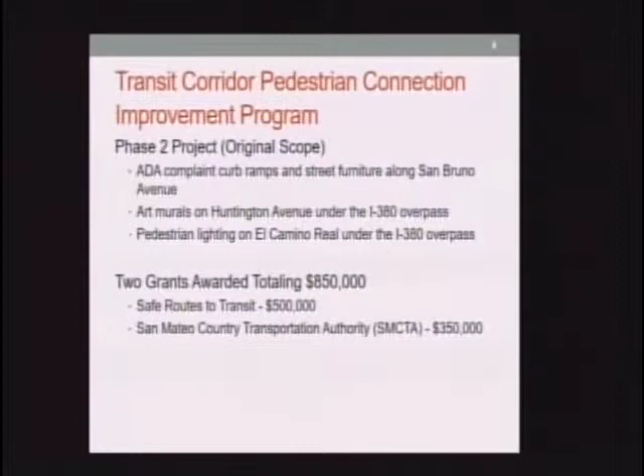Therefore, staff investigated a project rescoping. Staff reviewed available traffic collision data and prepared, in 2017, this collision heat map. What this map shows is an image of the collision heat map generated by Transportation Injury Mapping System using data from the statewide Integrated Traffic Records System, otherwise known as SWITRS. This data represents the years from 2008 to 2016.

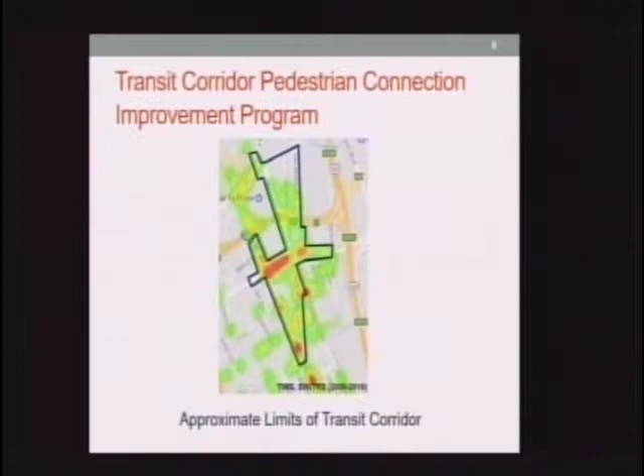Areas that are shaded in green, yellow, orange, and red are locations where collisions have occurred, resulting in injury. Areas with higher frequency or more severe levels of injury are shown in increasingly warmer colors in orange and red. When overlaid with the limits of the transit corridor, it becomes apparent that there is a hot spot along San Bruno Avenue between El Camino Real and Huntington Avenue, which is shaded in red, towards the center of the screen.

Staff subsequently also included the most recent updated information to include 2017 information, and similarly there is the hotspot on San Bruno Avenue. This was a map specifically for bicycle and pedestrian injuries.

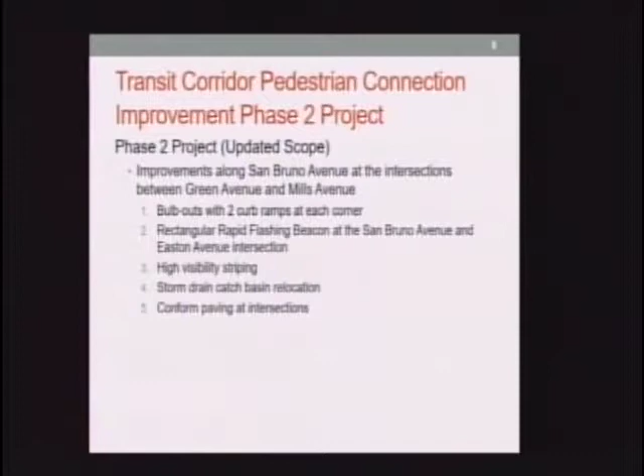With this information, a project rescope was developed. It avoided work within Caltrans right-of-way, which El Camino is. The project improvements included bulb outs with 2 curb ramps at each corner between Green Avenue and Mills Avenue on San Bruno Avenue, a rectangular rapid flashing beacon at the San Bruno Avenue and Easton Avenue intersection, high visibility striping, and incidental to this work would be storm drain catch basin relocation and conforming paving work at the intersections to allow the bulb outs to work.

I will provide in the subsequent slides a zoom in of each intersection. Contract documents were completed in January of 2019. The proposed improvements include installing bulb outs at the intersection corners, which increase pedestrian visibility to drivers and reduce the length of pedestrian travel across San Bruno Avenue.

Each proposed bulb out runs a length of approximately 25 feet along San Bruno Avenue. This distance was needed to accommodate space for 2 curb ramps at each corner. The consultant conducted a turning movement evaluation to confirm whether the proposed corners would allow vehicles of up to 35 feet in overall length, typical of delivery trucks, to clear turns without requiring drivers to extend into adjacent travel lanes. Based on their evaluation, they determined that travel into adjacent lanes would not be required.

In conjunction with the evaluation, there was also an assessment of the impact of the bulb outs on parking spaces, and it was determined that if all 4 intersections were to be constructed as shown, 9 parking stalls total would be lost on San Bruno Avenue.

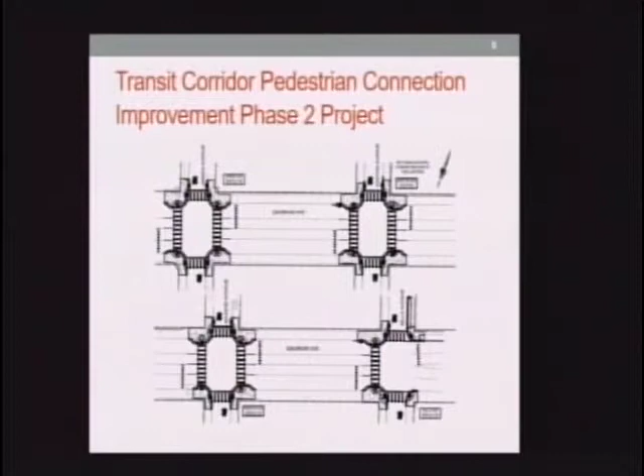The base bid is at Easton Avenue. There are currently in-pavement flashers that are difficult to maintain. Those would be replaced with a rapid flashing beacon that is above ground.

As you can see, 3 spots would potentially be lost. There are some existing red curbs, so there would not be a loss on the northeast corner. In the southwest corner there is also red curb, however it was determined that 1 spot would be lost.

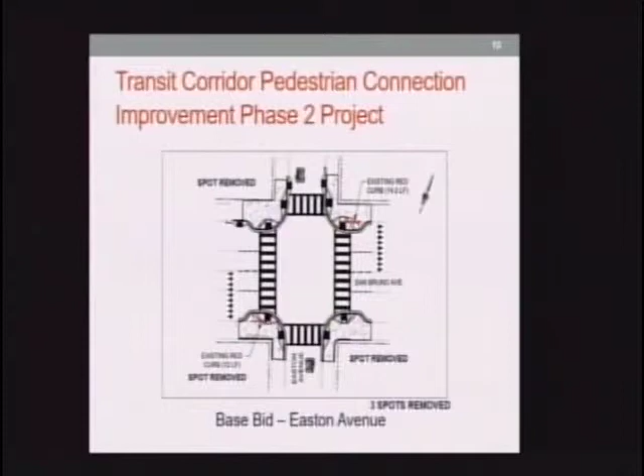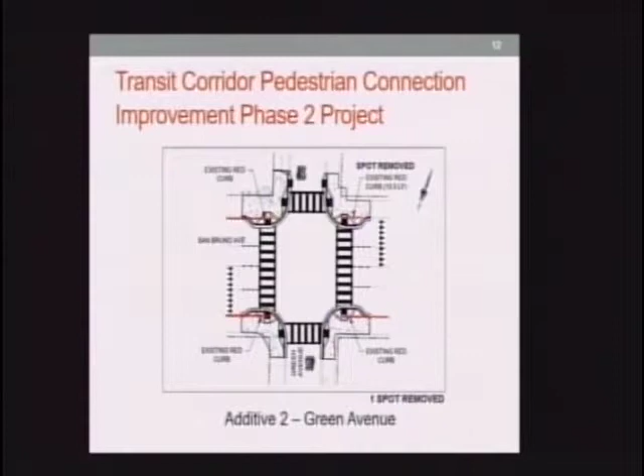On Masson, 3 spots would also be lost. On Green, 1 spot would be impacted. And at Mills Avenue, 2 spaces would be impacted.

The project was advertised in the local newspaper on January 28th and February 4th, 2019. Notice to bidders was sent to 90 contractors, posted on the city's website, and sent to 5 plan rooms.

The lowest base bid was from Golden Bay Construction. Their additive items were also the lowest. Golden Bay has satisfactorily completed numerous concrete construction projects for public agencies in the Bay Area, including the city of San Bruno. Based on their experience and performance, staff determined that Golden Bay Construction meets the qualifications to perform the work for the Transit Corridor Pedestrian Connection Improvements Phase 2 project.

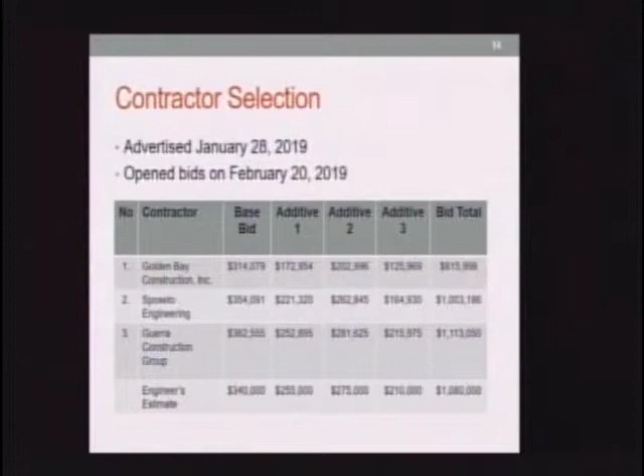As mentioned previously, there are 2 grant fundings totaling $850,000. Staff is recommending to award the base bid plus additives 1 and 3, primarily to most effectively expend the available funding without having to appropriate city funding as much as would be required to award all intersections.

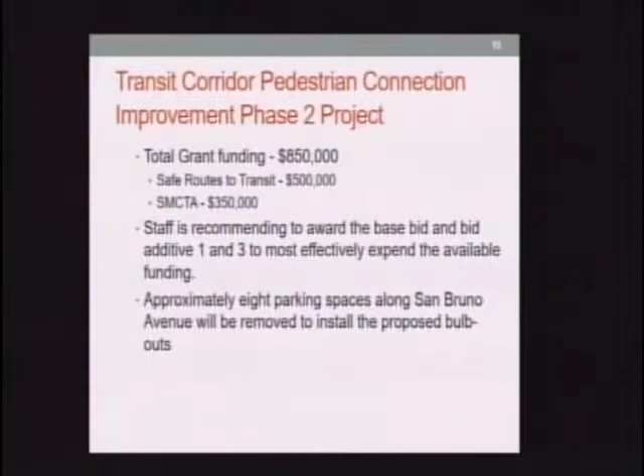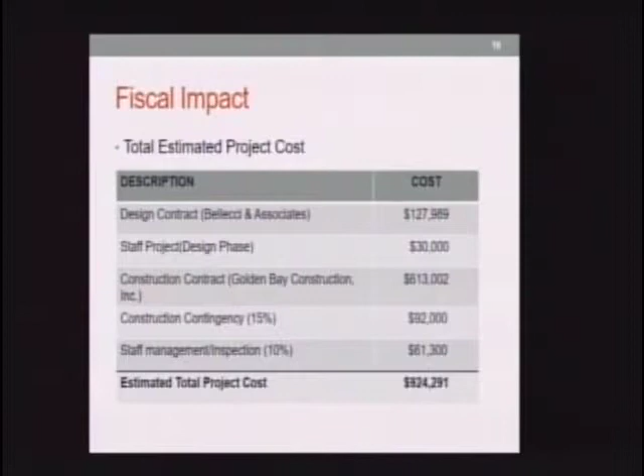As previously mentioned, approximately 8 parking spaces along San Bruno Avenue would be removed. This is a summary of the fiscal impact for design, construction, 15% contingency, and 10% administration inspection costs during construction. The total project cost is about $924,000. In order to make up the shortfall with the grant of $850,000, a $75,000 appropriation would be required.

There are some alternatives for staff's consideration. One is to award the base bid only. However, this will result in a loss of the SMCTA grant of $350,000, and 3 parking spaces would be removed.

A second alternative would be not to award the contract for the project at all, which would result in forfeiting all grants and potential impact to future ability to obtain grants. The third option would be to not award the contract for Phase 2, reject all bids, and instruct staff to re-advertise. This could incur additional costs and delay the contract such that we're unable to meet the deadlines for the grants.

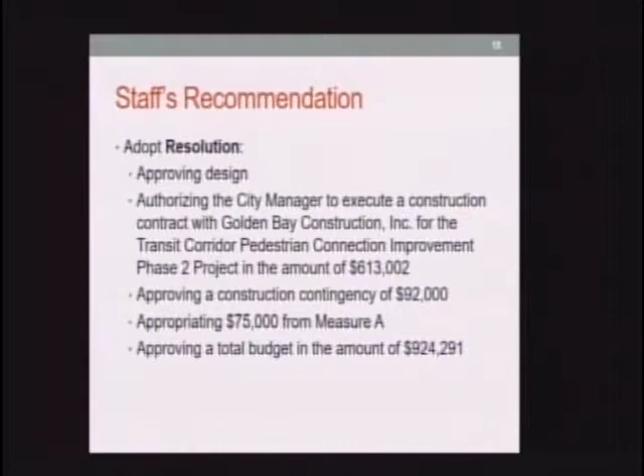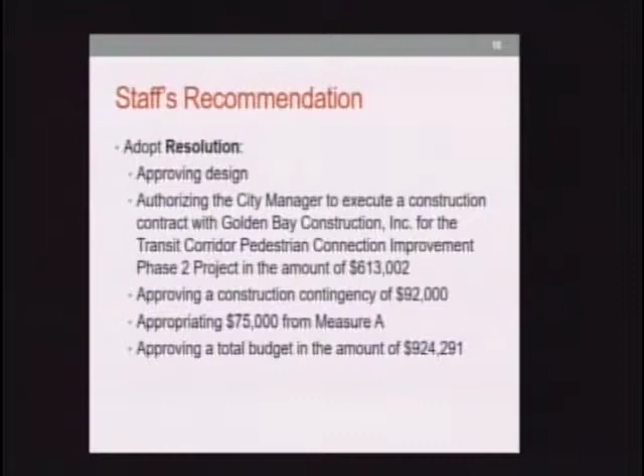In conclusion, staff's recommendation is to adopt a resolution approving design, authorizing the city manager to execute a construction contract with Golden Bay Incorporated for the project in the amount of $613,002, approving a construction contingency of $92,000, appropriating $75,000 from Measure A, and approving a total budget in the amount of $924,291. Thank you, I'm now available for any questions City Council may have.

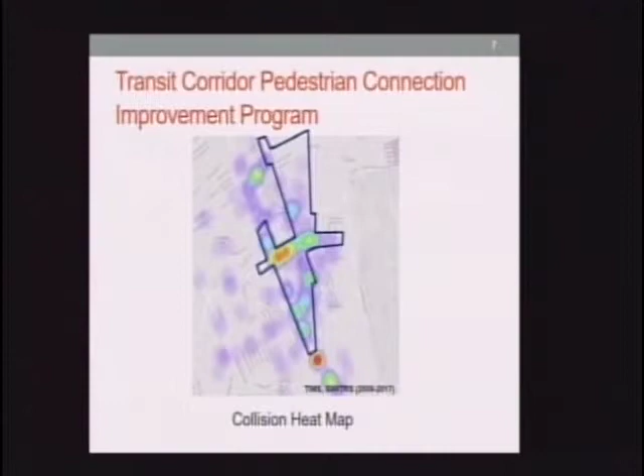So that's why the bulb-outs are probably the best solution, decreasing the amount of length of space they've got to travel. Correct, and the calming measures too, because cars are definitely speeding down there. So is that a sense of slowing down as well? Absolutely, that is one of the goals. And driver awareness as well. Well, safety is definitely number one, so thank you. You're welcome.

No, I think this is the first time I've seen this kind of map. I think it's great because it's very visual and easy to understand, and you're kind of going, oh my goodness. So I thank you for that, it was very interesting.

It's too bad we lose parking spaces, but as Laura said, safety's our consideration for this. So I think it's something we have to do, and I think it's the solution that you've come up with is fine. Marty?

And thank you for securing the grants. That's huge, $850,000 that we didn't have to get directly from the taxpayers. Some way or another, everybody's paying for that grant somehow or another, but...

There are 5 intersections that cross San Bruno Avenue, and the first at the west side, Hensley, is a really funky intersection because it's so close to El Camino. Was anything looked at that location? Not to my awareness, not at this time.